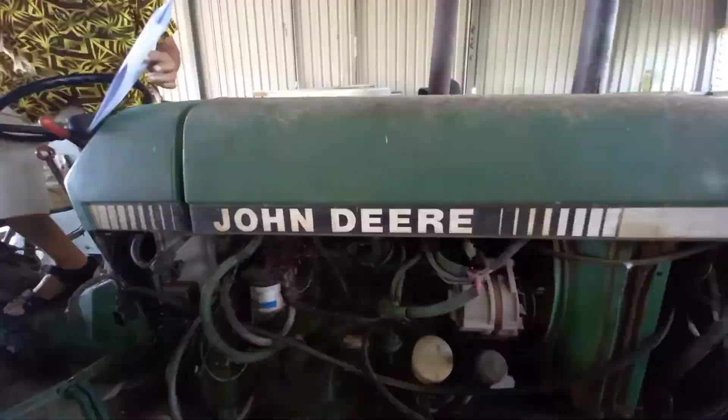The make of the tractor, like we did for the other. Maybe I go up top. It's a famous American brand, so it's a John Deere. That's the answer to number one.

Number two, model: 2250. Power rating. Power rating is the maximum power available to the tractor, and that's in the model. Look up specifications. Who has the book? Look at the table of contents.

Power rating, if you ever found it, you need to read it out for everybody's sake. What's our engine power rating at maximum speed? Engine power at rated speed for the 2250 is 46 kilowatts. It says there, 46 kilowatts. Engine power at rated engine speed, meaning the rated speed is the highest speed of the engine. For this tractor, it is 2,300 RPM, revolutions per minute. That's its rated speed, in other words its maximum speed of the crankshaft. 2,300 revolutions per minute, and at that speed it produces 46 kilowatts at the engine.

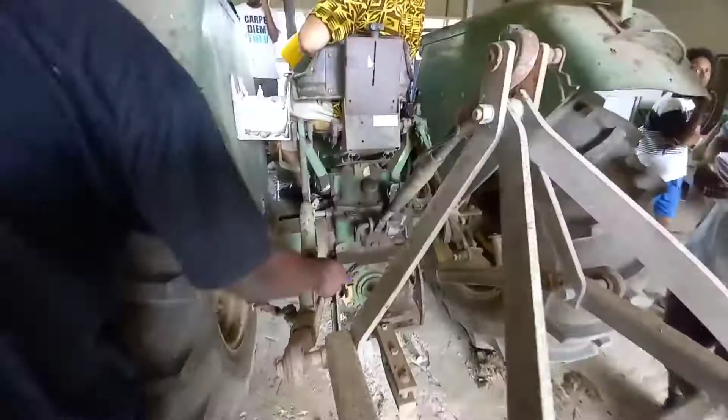Now the other part of the question is PTO, the power takeoff shaft. This is the shaft at the back here, where you connect the shaft of a machine that is spinning, like a rotavator. You attach it to this, and this will turn the shaft of the rotavator, spinning the blades. That way the tractor is not only pulling the implement, but also spinning, giving power to the implement to turn the soil. That's for the rotavator, so that's why it's called the power takeoff shaft, or power rating.

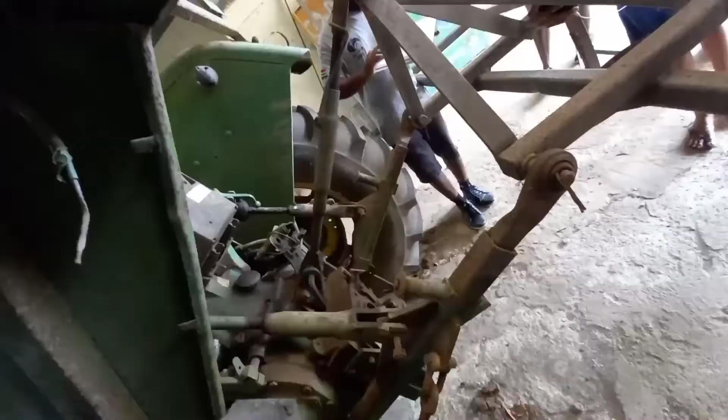It's written in the specifications: power speed for the power takeoff shaft. For this one it's 540 RPM, revolutions per minute. It operates at 540 revolutions per minute, and to operate it at that speed, the engine needs to be at 2070 RPM. So the answer to that question is: for the power rating, PTO is 540 speed at 2070 engine speed.

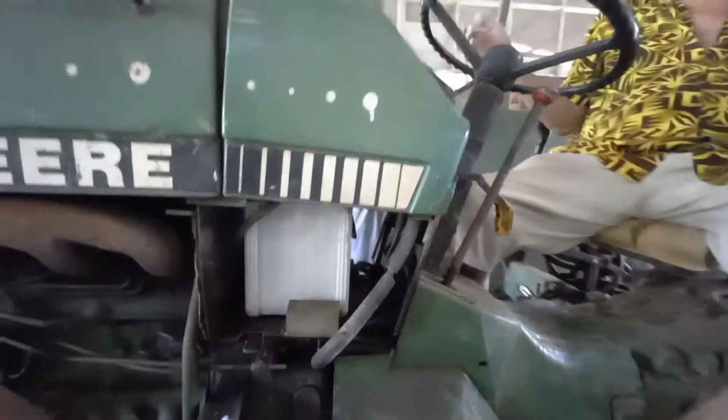Transmission type: conventional gearbox. It's a conventional gearbox, there's gears here, 1, 2, it's a conventional one. Power shift is where the shifting is done by the hydraulic system, but don't worry about that.

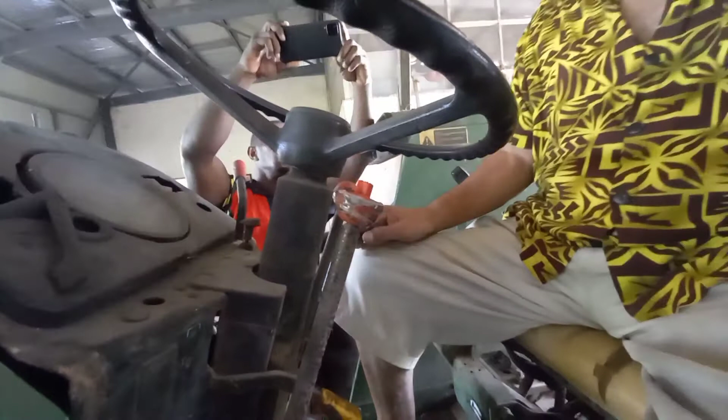Number of forward gears. This one has 2 gear levers here. The question is number of forward gears. This gear here is called the range lever, and this one here is called the gear lever. Both are part of the gear system.

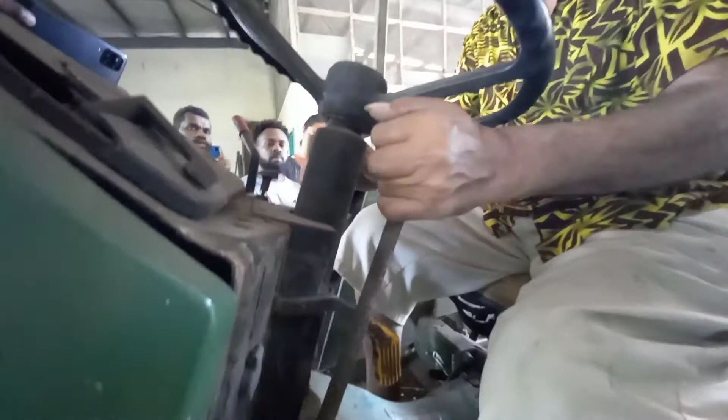Now if I go this way, that's range 1. Now if I shift these gears here, this is gear 1, so this is the strongest, because range 1 provides more power. Then range 2, this is range 2. And then this is the reverse, going backward. So this lever changes from range 1 to range 2 or to the reverse.

This one is the gear shift lever. This is gear 1, that's the strongest. So if you're just starting to pull an equipment, you probably use this one. Gives the most power.

This is gear 2, this is gear 3, this is gear 4. All of them are going forward, and that's for working in the field. But if you're driving on the road, you don't need so much power, so you can shift to range 2. You change this one to range 2, that's range 2, that's lower power.

So you shift this one. This is gear 5, just like gear 1 is the other one, and you can see it's written here, at the bottom: 5, 6, 7, 8. And that's the weakest gear, but the fastest. So if you're driving on the road going to the airport and there's no other cars around, you'd probably be using this one.

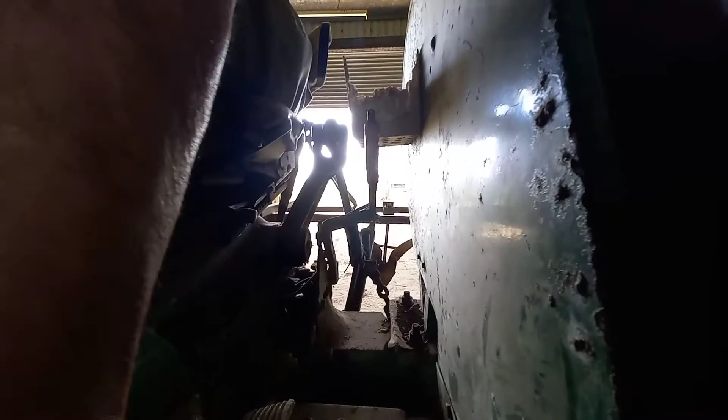Handbrake, yes, this is the handbrake. So just say differential lock - yes, there is a differential lock for this one.

We haven't covered that in class yet, but yeah, this is this one here - the differential lock, that one and this one here. Sorry, this one - this is the differential lock.

When you operate the differential lock, it stops the - because if you want to go that way, you turn the tractor that way, and those 2 tires will turn that way, and it will go this way. But if you activate the differential lock, it will not turn. It will go straight forward, no matter how much you try and turn it this way - the tires won't turn.

That's because sometimes, like in the United States where they have huge farms, you just lock the differential and the tractor will go straight ahead for miles and miles. Then you turn around, lock the differential, and it'll go without you having to turn the wheel. So that's the differential lock, and also for when the ground is slippery, that's when you use it. But just say yes, there's a differential lock.

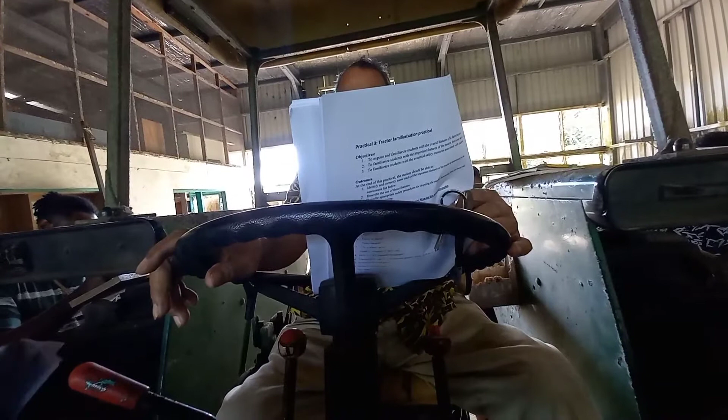Sometimes when you want the tractor to control the depth of plowing automatically, you use draft control. That means the tractor will feel the weight of the plowing. Sometimes it comes to rocks or rough parts of the soil and finds it difficult to go forward, so it lifts the equipment up a little, allows it to move forward, then comes down again. That's called draft control, D-R-A-U-G-H-T.

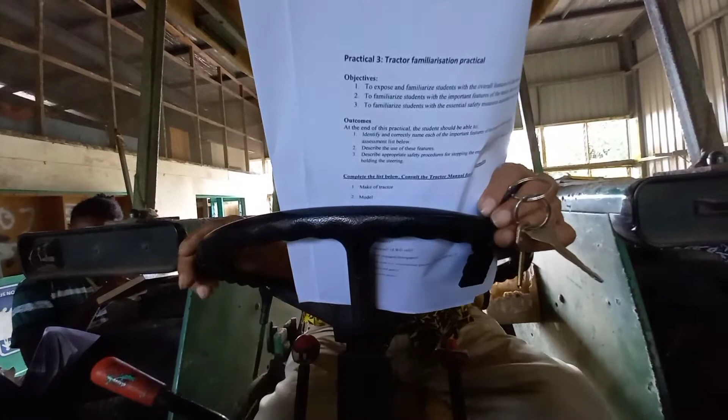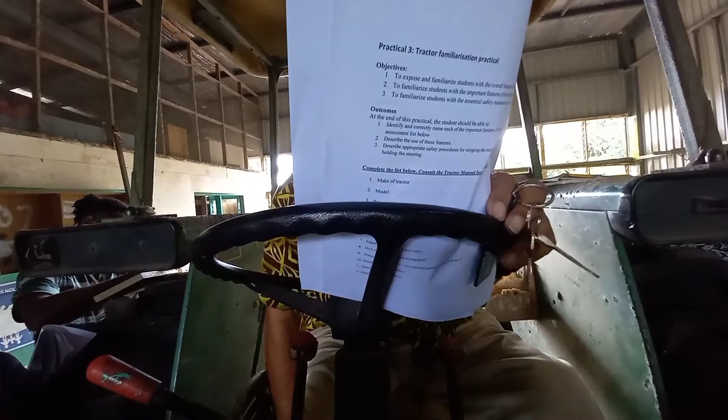Limit or proportional control is when you allow the driver to do that control himself, instead of the tractor doing it automatically. You put it to a certain position and use this to lift and put down the implement. That's position control, for the driver to actually do it himself. So that's what we mean by limit or proportional.

Top or lower link sensing, it doesn't say. I've had a look at this, it doesn't say, so just put unsure. We'll have to look it up on the internet.

Response control on raise, lower, or both.

External hydraulics control, this is this thing here. This is where you get the hydraulic hose from a different implement that needs control, and you attach it down the back here. There are the inlets. I think there's four external outlets. Number of external outlets is 4. External hydraulics control, yes, this is this one here. So it can operate another machine by using oil, hydraulic control.

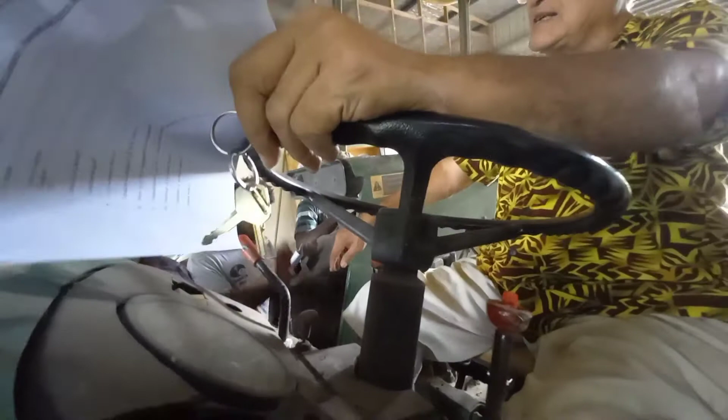Ballast types used: water. The tires in the back contain water up to 3/4 of the height. I'm not sure if this one has the water, but all tractors are supposed to have water up to 75%, and the rest is air. The reason is to increase traction so the tires can bite into the soil and not slip too much, particularly if you're pulling heavy weights. So instead of slipping, you add traction by putting water. That's what's called ballast, B-A-L-L-A-S-T, putting water in to make it heavy. In some countries, some tractors put iron heavy equipment on the back, adding pieces of metal. For ships that float, they use water too, pumping it in to pull the ship down so it doesn't fall over. So ballast is a common thing to add weight and traction.

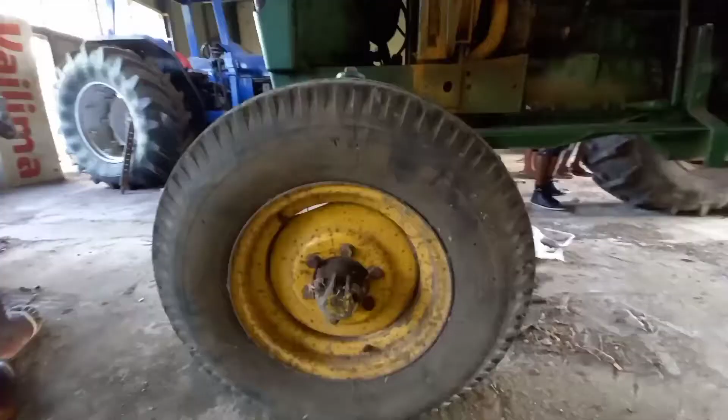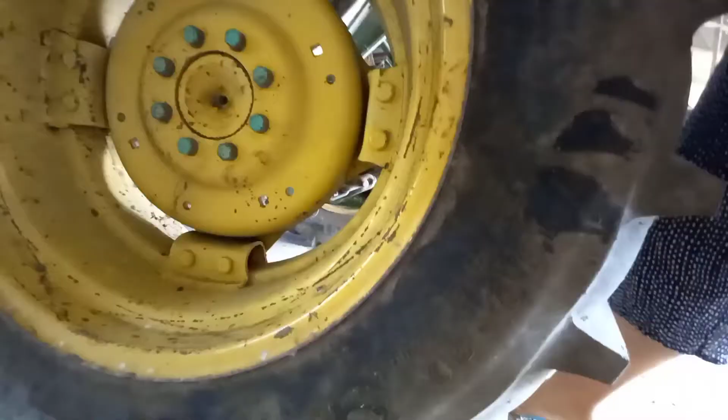Tire sizes. Okay, have a look at the tires. I think there's some numbers on the tires. Have a look at them. What is the width of the rim? I thought I put 16.9, that's the width of the tire. By 30, these are inches. The first number, 16.9, represents the tire width in inches. The second number represents the rim diameter in inches.

Okay, what about the one in the front? 7.5 inches width of the tire, and 16 inches diameter of the rim. Anyway, it's written here. What's the 7.5? That's the inches of the width of the tire, the width from one side of the wall to the other side of the wall.

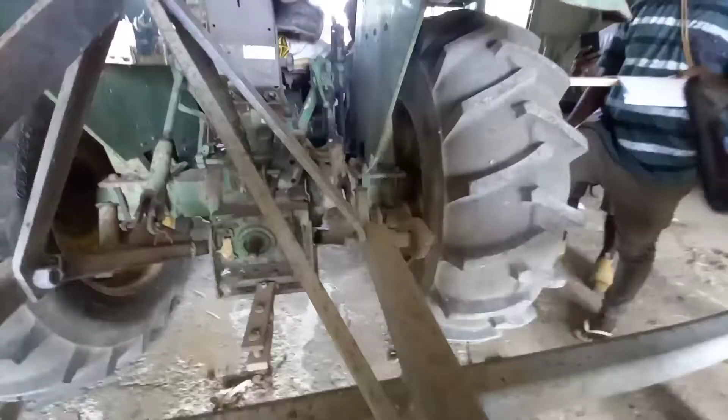Ballast or tire size. Category 1 or 2 linkages. There are two categories of linkages, Category 1 and Category 2. Category 2 is for big machines. See these hitches, those are Category 1. It's made so all tractors have a slightly bigger one, for different tractors. So when you're ordering machine spare parts or implements, you have to specify whether it's a Category 1 or Category 2 tractor. This is the Category 1 one.

Power steering, yeah, it's a power steering tractor. All tractors have power steering these days because it's quite heavy, so the steering itself is powered.

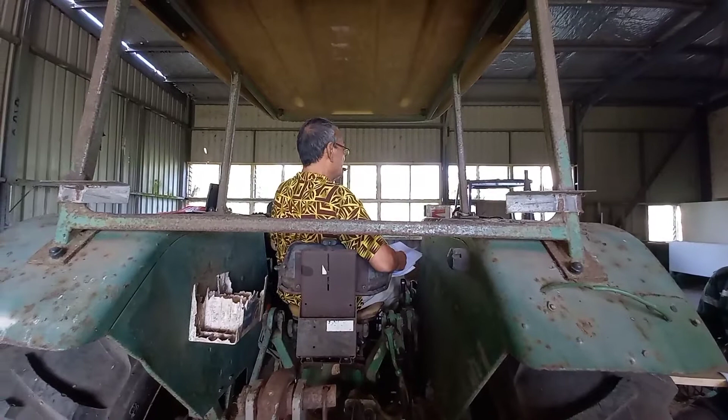To assess comfort, noise, visibility, precision of control, safety, you need to use 1 for poor up to 5 for very good. This one you need to answer yourself.

Describe how to start the engine, stop the engine, correctly dismount from the tractor, and correctly hold the steering wheel. Those things are all important because this is a very dangerous machine, and a lot of people have been killed in the past because of not following procedures properly.

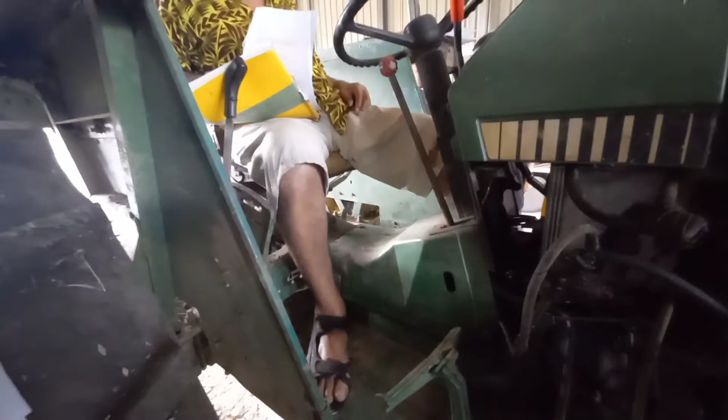How to start the engine: you have to make sure both gears are in the neutral position and the handbrake is on. You put your foot on the clutch, then you start the engine. You turn the key and press the start button for this one. We're going to do that shortly. We can answer the other question later.

To correctly mount the tractor, to get on the tractor, you climb up on the left-hand side, not on the right-hand side.

You can see it's got the brakes here, and speed control, and this lever for operating the up and down movement of the hydraulic system, the 3-point hitch. So only on the left-hand side you can walk up and mount the tractor. They put these rails on it for you to mount and dismount, this one and this one, so that you can mount up safely and dismount safely. Never ever come up this way or go down that way, on the right hand side.

Okay, that's question number 33.

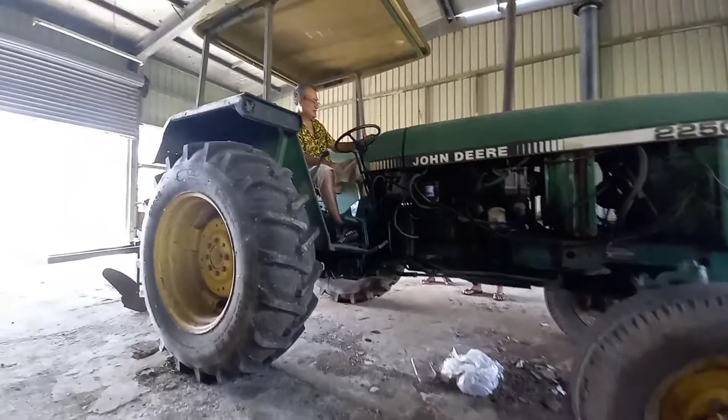Okay, last question. Calculate the mean effective pressure of the engine at rated speed.

Now we give this question every year, and everybody knows how to copy it from everybody else. I'm not sure, I think it's on the Moodle page, the answer to this one. But anyway, I think it's a good idea for you to work through it.

What do you need, is the question. It's the mean effective pressure at rated speed. Somebody do the calculation, organize the formula.

You start from IP. IP is equal to PME times lambs (L, A, N, S) over 2. Now what we want is the PME. So PME is equal to IP multiplied by 2 divided by lambs.

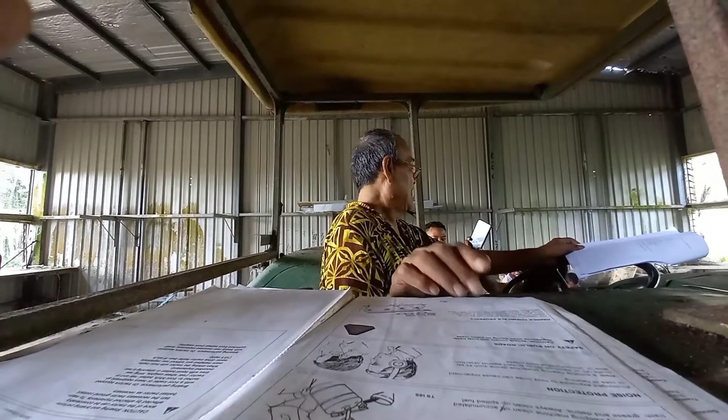So we need IP power multiplied by 2. The 2 is there. You need area, so what do you need? The area, you need the power. Pi d squared, pi bore squared over 4, so you need the bore.

Lambs, you need the stroke. N is equal to 4. Speed is, what's the maximum speed, 2,300, or 2,000, so you use those numbers. What we need to find is the power. These you find under specifications.

Specifications. Power, bore 106.5 millimeters, write it down. 106.5 millimeters. Stroke 110 millimeters.

What else do you need? Stroke, the speed, the rated speed, that's the maximum speed, 2,300 RPM. The speed, that's the one you want to find. The question is: stroke is 110 millimeters. Calculate PME, the mean effective pressure, because that's not given here.

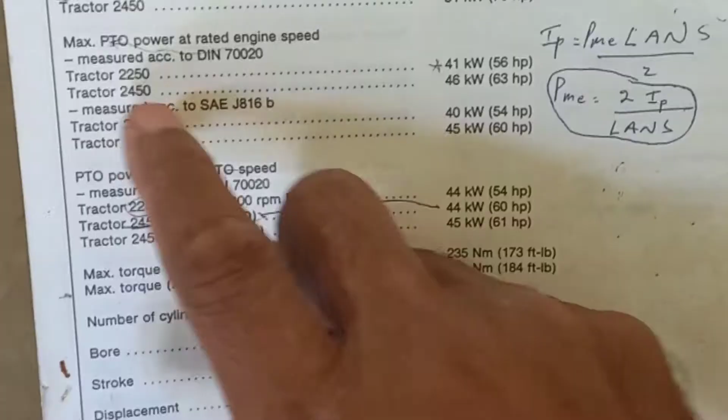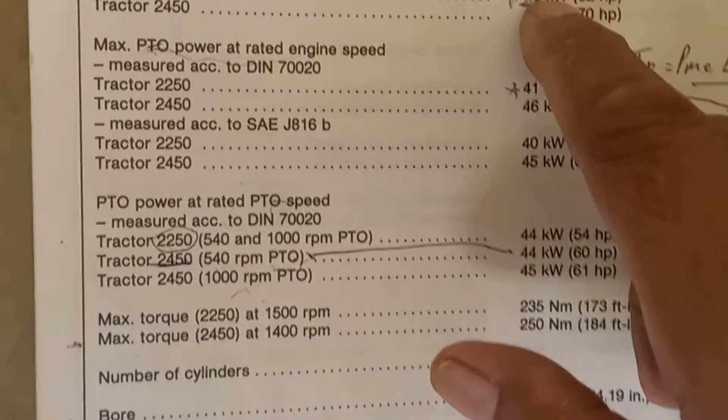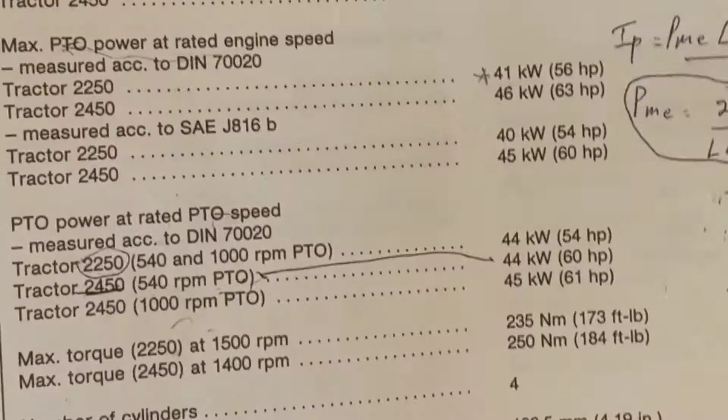Is 41 kilowatts. So the power rating is... oh, the 46, 46 kilowatts. The power is 46 kilowatts. Okay, the rating, yeah, that's the power rating. Rating is the maximum speed that the engine can reach.

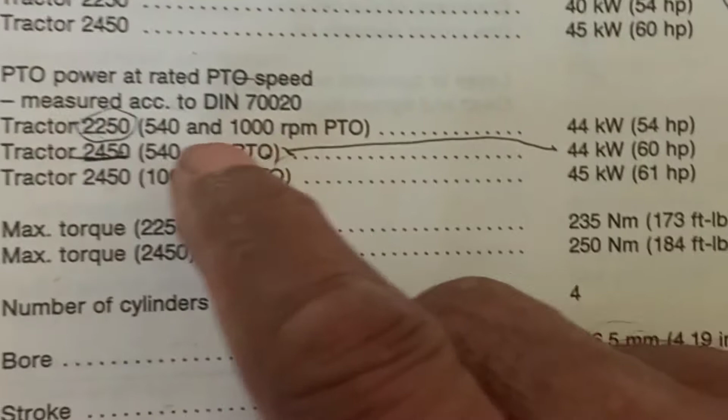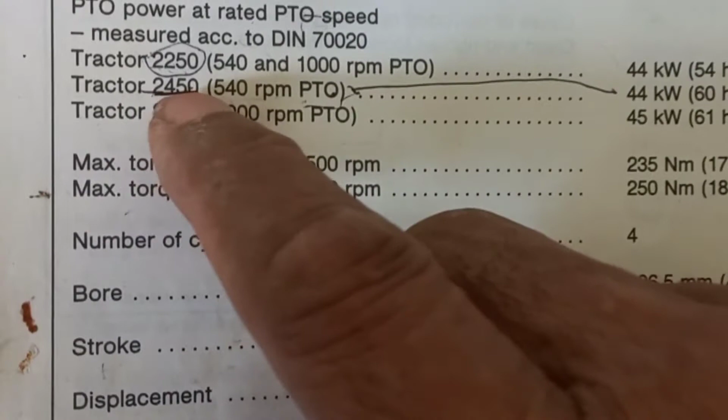And the PTO, PTO at rated PTO speed is 44 kilowatts. Yeah, tractor 2250, 540 RPM, 44 kilowatts. Okay.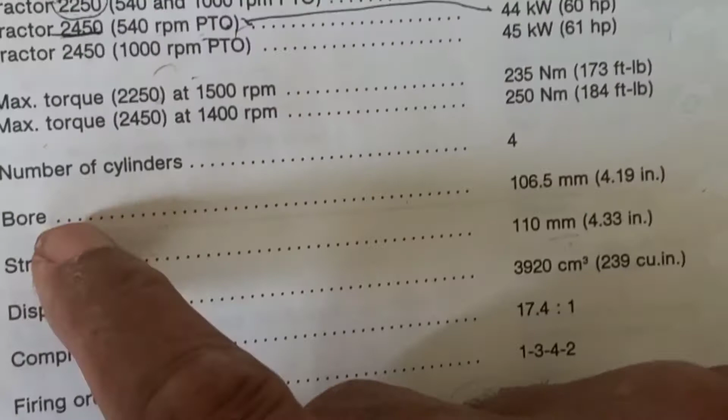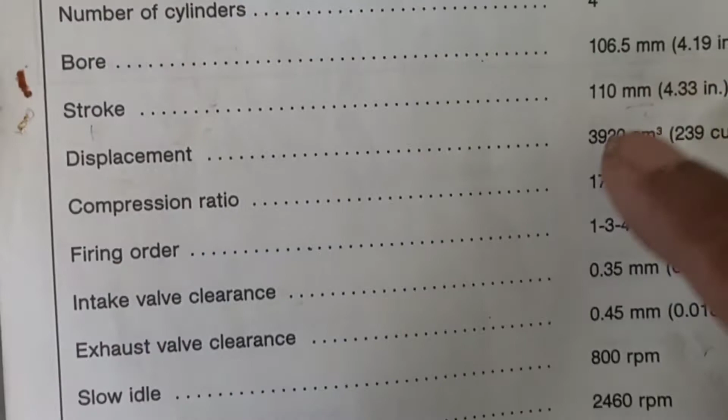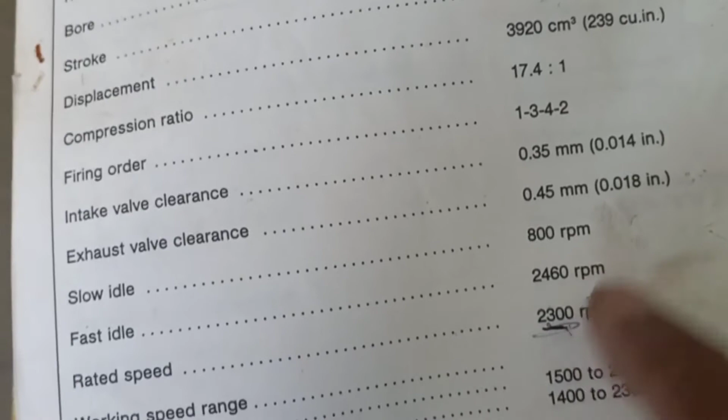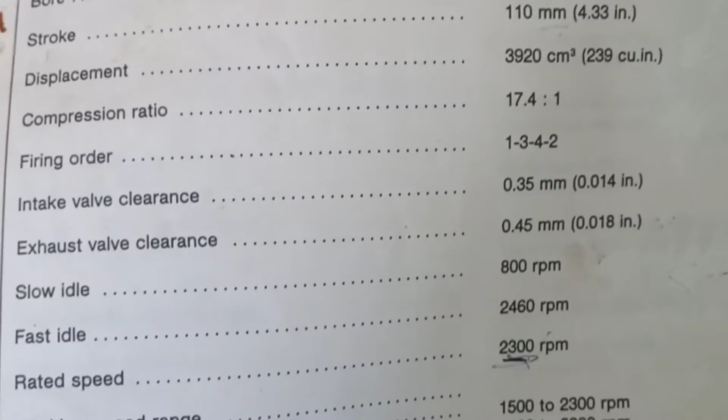The bore is 106.5 millimeters, stroke 110 millimeters. Rated speed is the maximum speed, it's 2,300 RPM. But for the speed for the PTO to operate, 540 RPM, PTO speed is 2,070 RPM of the engine. Okay, so that's it.